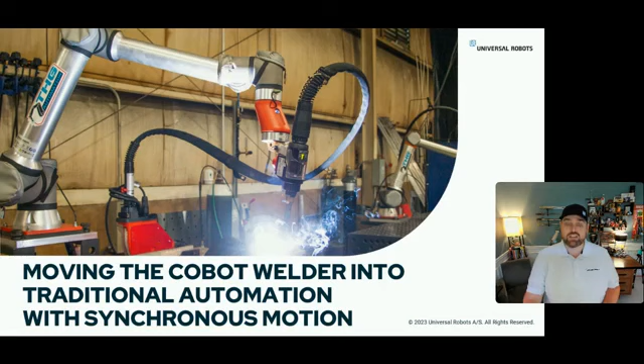You know, I always like to start out with, in metal fabrication, we do have some challenges, right? And we're going to talk about today how collaborative robotics is helping this.

But those challenges are things like major market trends that are having an impact, like our aging workforce and our rising labor costs. We have persistent vacancies. Even with the softening in the market, we still have nearly 900,000 job openings as of half a year in the United States in manufacturing and warehousing and logistics.

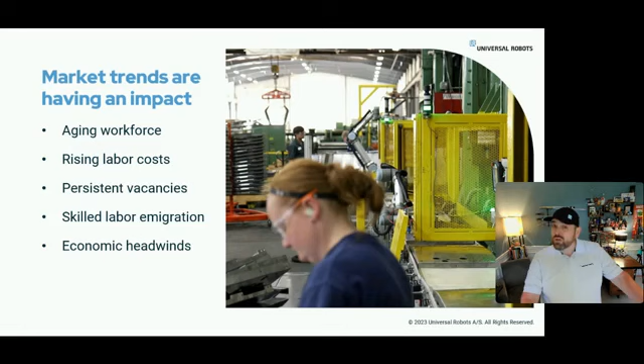Then, you know, we've got skilled labor emigration if you're in low cost of labor areas. And then there's just general economic headwinds going on right now that are all having an impact.

You know, also traditional automation requires robot technicians. And these robot technicians, their mechatronic skills and electrical and automation skills, these are in short supply. So when we have limited staff, it's really hard to take somebody and send them to a two-week offsite training course.

So that really, or if that person leaves and goes fishing, no one can run the robot because Jim's the only one that knows how to run it and he's off fishing. So what I want you to think about is don't try to trade one hard to fill role like a welder with another hard to fill role like a robot tech.

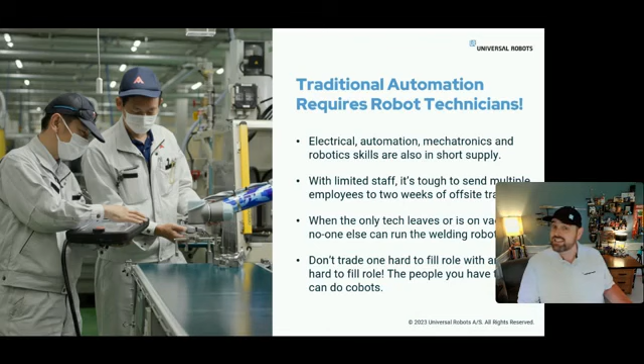So, you know, one of the biggest things cobots really bring is the people you have today can do collaborative robotics.

And then when we look at the weld shop itself, there can be a challenge, right? Depending on the material coming in, we can get unpredictable part fit up, or we can get variable worker productivity. On a hot day, we make less parts.

On a cold day, we make less parts. On a day after the Super Bowl, we make less parts. You know, so there's really that variable productivity.

There's post-process grinding and pre-assembly of parts, or banging it with a hammer. And so we get kind of this inconsistent productivity.

We end up with inconsistent output quality. If we're taking someone from a fryer on Friday and handing them a weld torch on Monday, it can cause quality issues. And really, ultimately, all that puts together really erratic production planning for the production management.

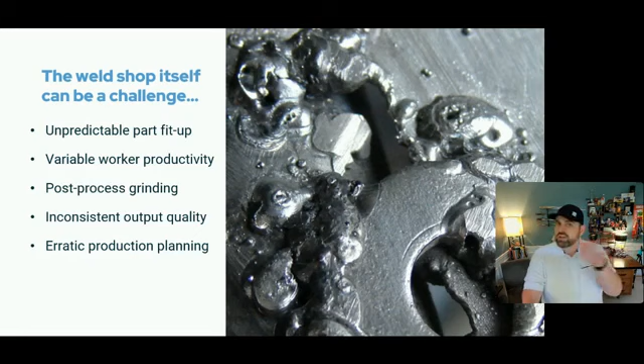And how do we get more consistency and more predictability in the weld shop itself? All these things come together and many more challenges that we're facing. It delays our production schedules. We have that inconsistent product quality. We could even lose customers or lose opportunities, even turn away business sometimes.

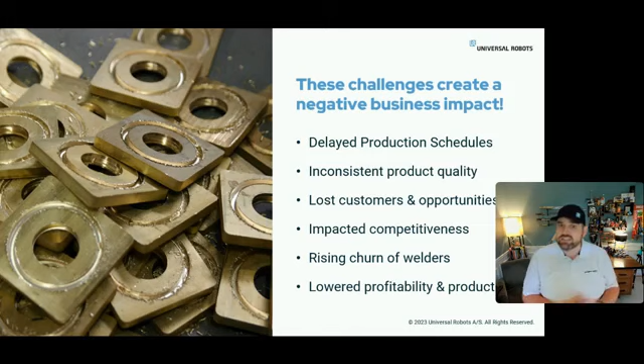We've talked about this in other webinars. And so how all this impacts your competitiveness, and it maybe even raises the churn of welders you have, ultimately leading to lower profitability and productivity.

So if we want to overcome those, collaborative welding is one way that many metal fabricators are overcoming this. So what is collaborative welding? I want to talk about that with you today real briefly.

You know, we have always embraced new tools and work. When we look at assemblers, they aren't using a basic screwdriver anymore to screw drive things and assemble things together. They're using drills and torque guns, right?

It's raising the quality level. It's making the work easier for the worker. When we look at carpenters out in the field, they have a nail gun.

They're not banging things with hammers over and over again all day. They get less repetitive stress injuries, and that's better quality, more consistent assembly of the carpentry. So when we look at other professions, especially other skilled trades, we see that there's investments in tools to make the work better. And the collaborative robot is really one of those tools.

We need the knowledge of the welder to build the weld. We need the knowledge of the welder to teach the robot what to do. But this is a new tool that we should embrace, just like the torque gun is there for an assembler, and just like the nail gun is there for a carpenter.

So we look at the Universal Robots cobot, and what's really powerful there is it's a very user-friendly technology for welders. The programming interface is very simple with step-by-step pictures from different partners, simple to set up, and you can review the path before you weld to make sure that you're getting the right angles and the right path you want. And then the ability to reach out and grab the robot and put it where you want it, be able to free drive for positioning the torch.

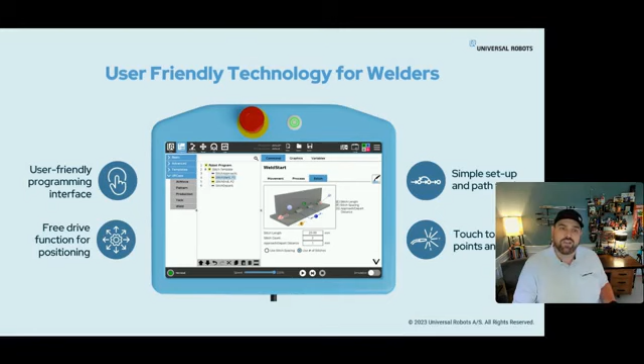Welders are very mechanical. Welders grab the torch and physically put the torch where they need it. They can grab the robot and put the robot where they need it. And so it's very easy for a welder to understand how to interface with the software. And then ultimately, the collaborative welding tools utilize this kind of easy and intuitive touch to teach style of programming that basically eliminates the need to be a robot programmer.

And so, partners like THG, and you're going to see some of their stuff today, they've got a teach flange on the end of the robot. So you can bring it in and free drive, and you can program in simple buttons. This allows us to do changeovers quickly. This allows us to really teach people quickly how to utilize a collaborative robot.

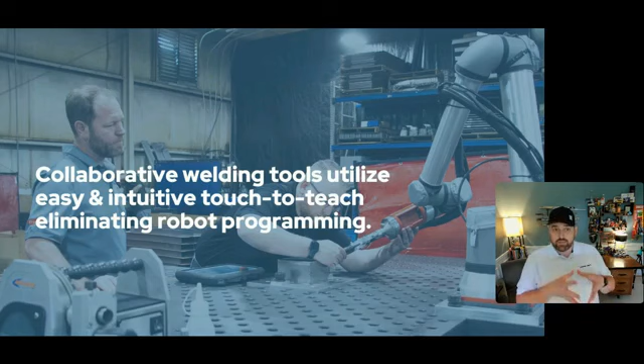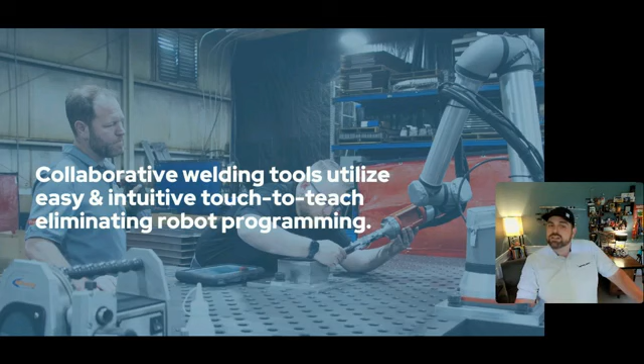So the power of this is really coming for folks in that we're not replacing the welder. We're really augmenting them and making them more efficient. Better quality is coming out, more consistent quality is coming out over long batches and long runs. And then the welder's more engaged because instead of doing boring work now, they teach the robot to do a simple 6-inch straight line weld. The robot does the 1,000 pieces while the welder goes and does something more creative. And so it gets rid of that focus on robot programming and gets people welding.

So Universal Robots and our partners have been doing collaborative welding for almost 8 years. The initial welding applications mostly were in the MIG space with some TIG, actually more than a little bit. And there are a lot of skill capabilities inside the partners, weaving and patterns and tacking and all these kinds of things, multi-pass and different layers and circular arcs and linear paths, and many different power sources are compatible. And you're going to hear from Matt about Fronius specifically today.

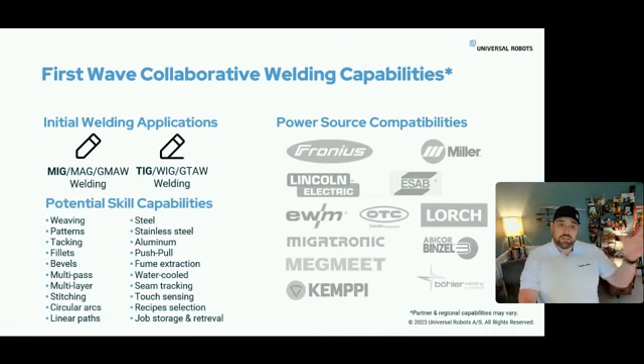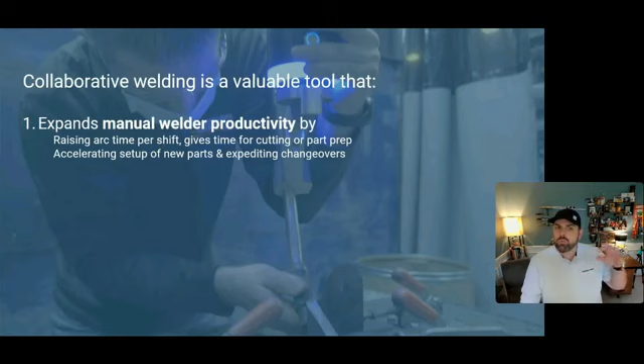But ultimately, this first wave of collaborative welding capabilities brought value in 3 ways. The first: it expanded the manual welder productivity. Most of the case stories you hear, 2x, 4x, even 10x sometimes, raising that arc time per shift, giving more time for cutting or part preparation, helping them accelerate the setup of a new part or changeovers being faster. It also drives production quality and consistency.

It improves the process repeatability, so we're making the same part each time, reduces the rework queue because we're not over welding and we're not creating areas of the part that we have to rework. And we're eliminating distracted welding from dull, repetitive volumes. If someone has to make 1,000 hanger brackets, that can be really boring. And we can probably see exactly where that welder gets bored.

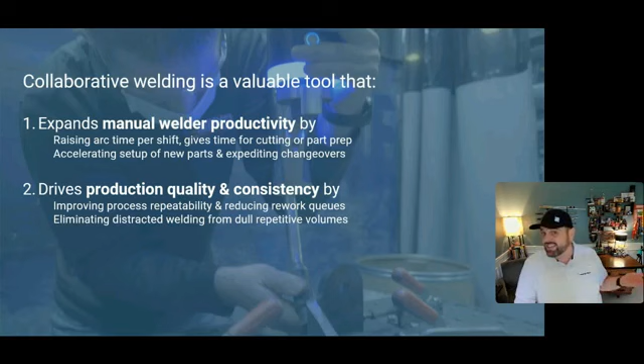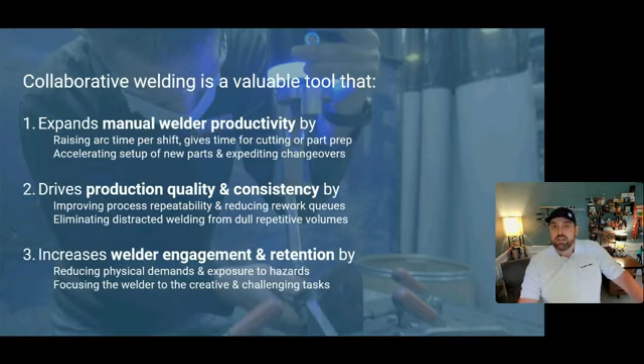And then it increases that welder engagement and retention because we're reducing the physical demands, the repetitive motion, the exposure to hazards like smoke and arc flash, and focusing the welder on more creative and challenging tasks. And so there's opportunities here, either in one piece or in 1,000 pieces, to do really cool things. But really, there's so much more.

And so with 8 years of this going on, there's a lot of advancements in collaborative welding that have been going on. And that may be a little bit hard to see. Sorry about the contrast there. I need to change that slide in the future.

But laser welding is being done by a couple of our partners here in North America and some in Europe and some in Asia. Spot and stud welding is going on. Metal cutting, you're going to hear about metal cutting today. Thermal spray coating, cobot portability, the fact you could bring the robot to the work, tending like a resistance welding machine, and then expanding the reach and high volume. And so I want to focus on the last 2 today, and you're going to hear about a couple of these also from Matt.

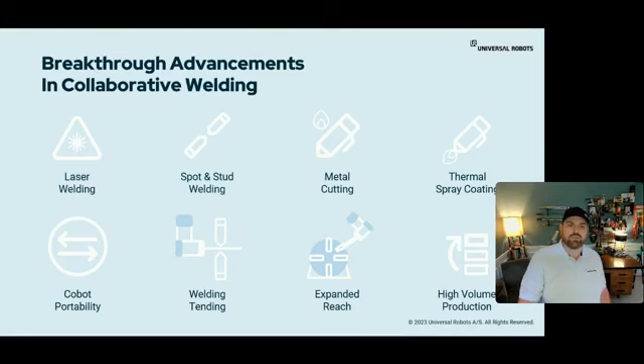But high volume production and traditional automation: most folks, when they think of a cobot, they think of high mix, low volume, and they don't think of high volume production. But actually what we're seeing in the market is many people are embracing the cobot for more traditional automation applications and higher volume production applications.

So here's a quote from Chris Anderson. He works for Betcher Manufacturing in Mexico. And he said, "I was having an issue getting qualified people that could program, adjust, and develop the setups for new products on our existing traditional automation cells.

I was looking for something that was easy to use and easy to teach, something that didn't take a college education or high school education, that somebody could operate it and understand it. For operators to just be able to grab the torch, put it where they want it, and simply say touch up was huge." And that came from a previous webinar.

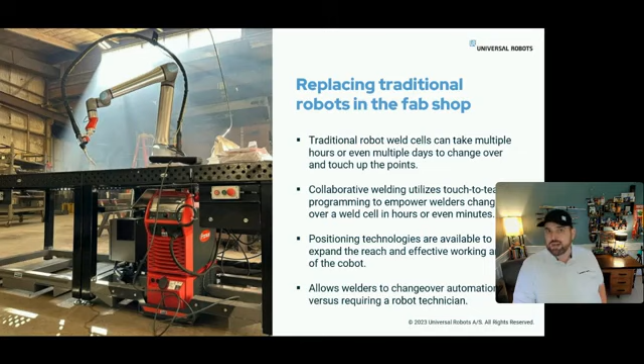And then also, positioning technologies are available to expand the reach and effective working area of the cobot. And all of this allows welders to change over the automation versus requiring a robot technician, which is really powerful, why you're seeing this happen.

One of the things I do have to point out, I don't know why my picture didn't show up there, but we're going to go with it.

A cobot is a robot, and it's something we have to think about. As we add traditional automation around the cobot, we do have to do safety assessments, and we have to look if there's curtains or those kinds of things. And then people say to me, well, then why would I use a cobot?

And it's ultimately about the touch to teach and the really simple to use programming interface, the graphical interfaces, and the step-by-step instructions about how to teach a weld that the cobot brings, that the robot doesn't, that really makes the cobot interesting in more traditional welding applications.

So even if you have to add safety, or you have to add guarding around the other pieces of automation equipment in the cell, the fact that the cobot can be taught in that simple way by non-robot programmers is a huge value for many people, and what we're seeing being done in the marketplace.

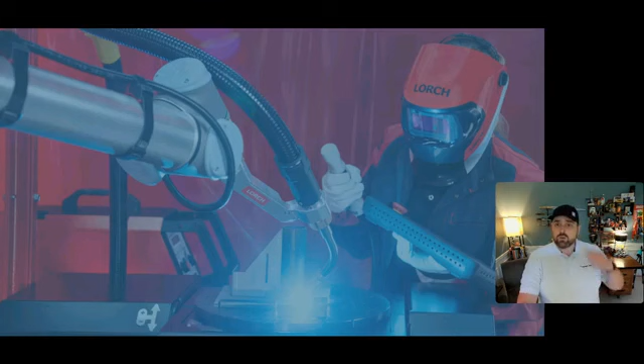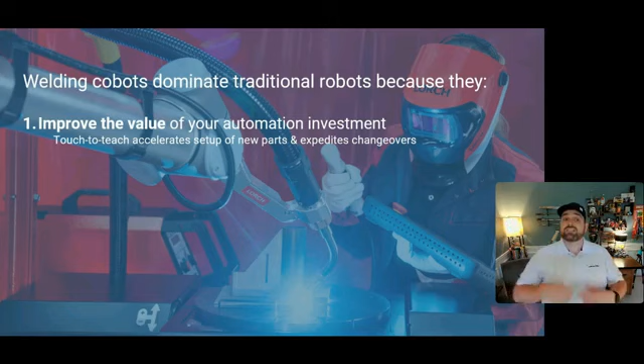So when we look at why welding cobots are starting to dominate traditional robots, it's because they improve the value of the automation investment. When you buy that automated cell, that touch to teach accelerates the setup of new parts, it expedites changeovers, and it creates shorter deployment and commissioning timelines.

If you think about return on investment, from the moment when you decide you want to buy automation to the time when you actually get the payback at the end, the amount of time to build out all the automation, plan the automation, and find partners and get everything going can take a long time with traditional automation.

And typically the cobot's a little bit shorter to do the deployment and the commissioning part of the project, and that allows you to get going faster. So then when we utilize the existing workforce, not traditional robot techs, that brings a lot of value, right?

We have many people that we've had conversations with over the last 2 years with traditional robot cells sitting idle, dusty, because the trained robot tech left or forgot how it works, or it was just too hard, so they decided to weld the parts by hand instead.

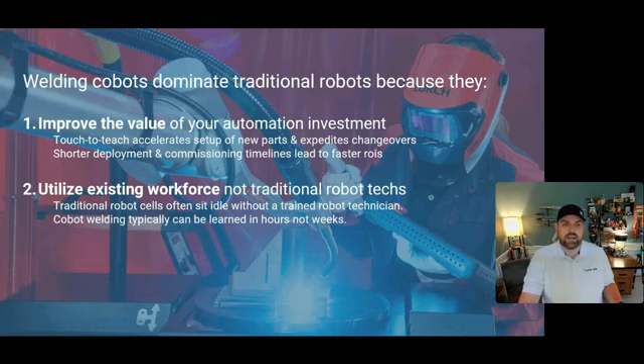Cobot welding can typically be learned in hours, not weeks, and that's really valuable for folks. Days, typically. So then we can expand the impact of automation in the shop, right? Then we can create value for more of our production mix.

I see a lot of folks even use a Cobot for single piece jobs because the quality is more consistent and higher, especially when you're doing retail displays, something that's going to be general public facing. You want the quality of the welds to be really nice, right? And then portability is leading to all kinds of new possibilities about bringing the Cobot to the work.

So when we're looking at expanding the reach of collaborative welding robots, the first thing that most people think about is get a bigger robot. And the UR20 is there. The UR10e is by far the most popular welding robot that we sell. The UR10e reach is 1,300 millimeters, and that's a very powerful robot.

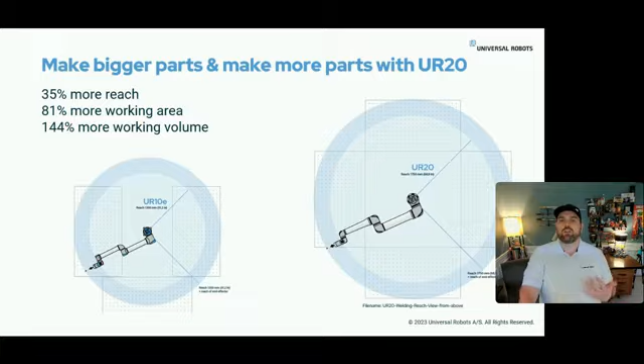By expanding to a bigger robot, we get that much more reach, that much more working volume, more than 100%, 144% more working volume out of a UR20 versus a UR10e. But even if those aren't really working, many people, when they go to traditional automation for welding, look at external axes or positioners or rails. And those become part of the automated cell.

And so we get the question a lot, can cobots control these? And the answer today is yes, absolutely. Cobots can control these with the Universal Robots Motion Plus platform. Motion Plus is this add-on software. It's an API that allows the UR controller to coordinate robot motion with external servo axes.

Again, my picture didn't load. I'm not sure what's going on with my deck, but we're going to keep going.

So this API really consists of functions of coordinated motion. It uses EtherCAT for drive communications with the servos, and even more functionality will be added in this space as we go into the future. Motion Plus enabled solutions from Universal Robots, you can get them from partners, integrators, OEMs, and end users can use these to expand the capabilities of their robots through external axis control. This is really enabling more and more traditional robot applications. You're going to see some of those from Matt in a second.

So how does Motion Plus work in the most basic way possible? The UR controller itself contains the model and the kinematic tree and everything necessary to make the coordinated motion happen between the robot and the external axis. We have an EtherCAT URCap service that does the communication between the servo and the robot, and no external PLC is required to use Motion Plus, but it is an API that's integrated by other folks. This is a back-end integrated by UR, and then partners like THG integrate it into their product.

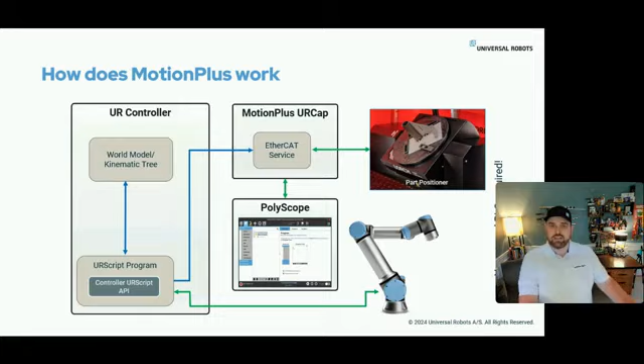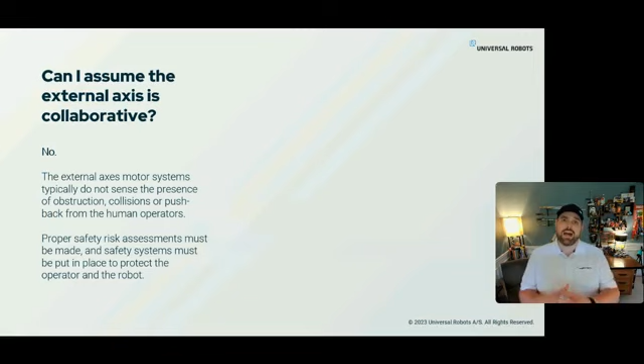So can I assume this external axis is collaborative? Unfortunately, you cannot assume that an external axis is collaborative. That's not the intent here. The external axis motor systems typically don't sense the presence of obstructions or collisions or pushback from the human operators. So proper safety risk assessments must be made when utilizing external axes, and likely safety systems must be put in place to protect the operator and the robot from the external axis.

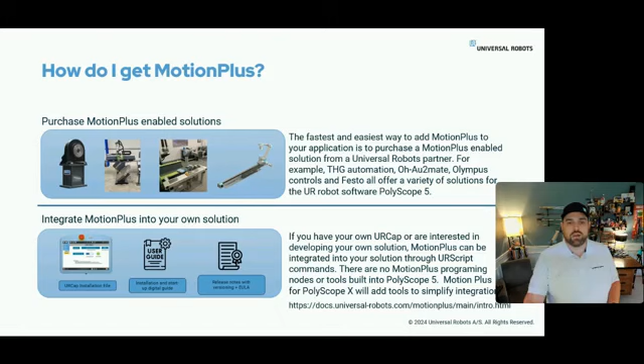So how do you as a user access Motion Plus? Ultimately you purchase the Motion Plus enabled solutions from partners like THG Automation. You're going to hear about Matt's solutions next. Or if you're someone who actually makes solutions, maybe one of our partners in the audience, you could integrate Motion Plus into your own rail or your own axis, and the information's on the UR website. So UR ecosystem partners absolutely make all of this possible.

I'm so excited to have Matt here. With this philosophy that we have at UR, where we're a platform that others can build successful organizations on, we're really committed to your success, and to their success at helping you have access to automation. So I'm going to turn it over to Matt. Matt's going to talk about the Cobot welder with synchronous motion. I'm really grateful he's here. And Jules, if we can share Matt's presentation, that'd be great.

Thanks, Will. I appreciate that. Your presentation was great, and I think it was spot on, explaining the iterations that the platformers went through and how partners have expanded on the capabilities of Universal Robots API, the URCap capabilities, and being able to move into new directions and expand their app store for robots.

And I think you said something really great, that cobots are robots. And I think at some point in time, cobot's going to be a less important piece of the description, and more of the mainstream explanation is what you can do with it and the types of applications you can apply with it. So yeah, my name is Matt with THG Automation.

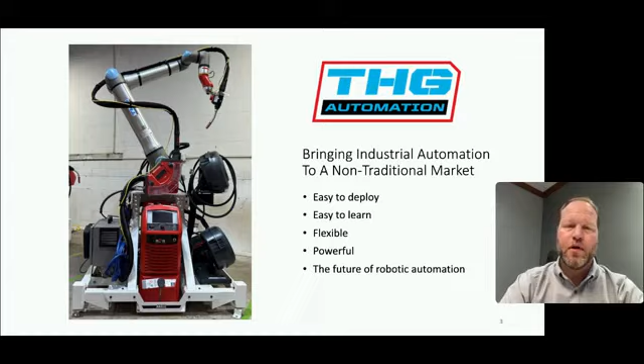We started out with Universal Robots because at the time they were the best, and we still think they're the best. They have the most robust, well-supported, consistent quality product we've ever seen. I've worked in robotic automation for decades, and I've seen a lot of stuff show up on the floor that was DOA—no good, had to be repaired, failed right before runoffs. It just didn't have that consistency. Universal Robots has been rock solid for us, so we're glad we made that choice.

We use Siegmund tables for the welding side of things because we think it's again the best thing you can buy. And obviously you have the other industry leading partners with Hypertherm and IHT, which we also integrate. There's other things we're doing too—we're going to release some IPG laser welding systems here soon as well, and you'll see a little bit coming up here.

The portfolio that we have with THG Automation spans quite a bit of processes and capabilities. I want to get into this because it spells out the overall theme: you can now integrate with external axes and Universal Robots Motion Plus, which ties this all together. There's so much coming that traditionally customers couldn't accomplish, because they couldn't take the advancements of traditional automation but still have the ease of use and flexibility of the Cobot.

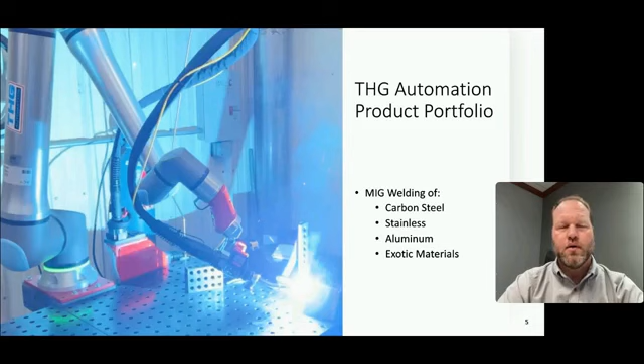We also do TIG welding. TIG is not as easy - it's really a credit to the welders out there who are good at MIG or TIG welding. There's a lot happening at once, and it takes somebody with good knowledge to make it work right. But we have customers, especially in aerospace, that require it, and food grade applications often need TIG too. So we built a TIG welding solution that's nice and rounded, with just about every capability you can imagine with any traditional automation. We do that with our Cobot because UR has the platform that allows us to create the software and functionality our customers need.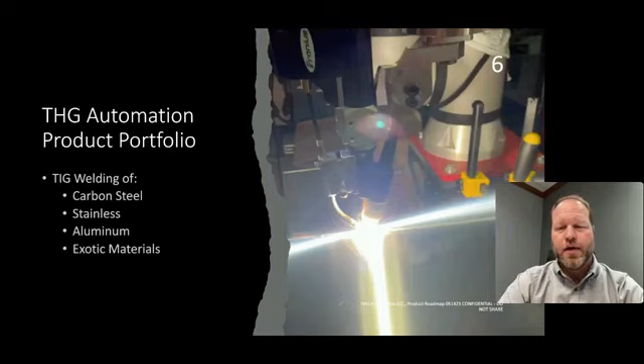We've got oxy-fuel cutting too. Customers use this for thick materials and beveling. They'd had a lot of issues with track-based solutions trying to cut parts, with high scrap rates and mistakes. So we generated this Universal Robots-based platform with IHT so customers could easily bevel and repeat processes with the oxy-fuel cutting solution we source from IHT. IHT has done a great job creating a complete package that's great for gantry-based or 6-axis robot-based applications, and that extends to what we do with plasma.

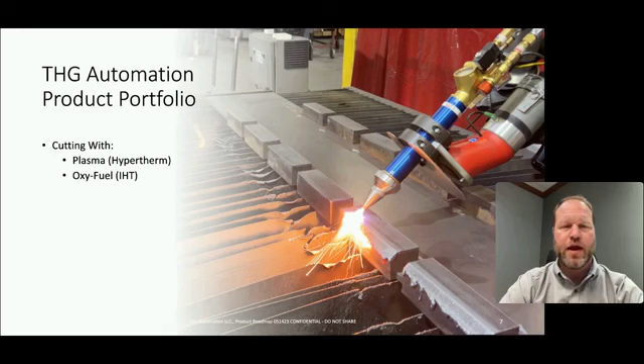With plasma, we've got some really cool stuff coming, including the ability to cut corrugated material without programming all the undulations in it. Of course you can also do simple shapes just by putting the robot where you want it and specifying what size hole or what type of square or rectangle to cut. We've built some really cool functionality because we have the platform to do it with, and we're excited to get more of that out. As time goes on, the website will be populated with that, and the UR Plus platform that UR created for us is really awesome - you can go on there and peruse all 400-plus different applications Universal Robots offers.

The last piece we currently offer with our welding and cutting solutions is up to 4 axes of linear or rotational axis control. We use the robot controller and Universal Robots programming platform to control up to 4 axes. It works great - it's Modbus based right now for consistency with the controller's capabilities. We've been selling a lot of positioners in linear and rotational axis types to customers all over the world. It's been a hot item.

We saw this coming - we saw the capabilities customers were looking for, and this is the nexus, the next thing that needed to come with the Cobot, because ease of use needed to expand into more traditional automation platforms. Probably two years ago we came out with this for a customer, and it's exploded from there. I don't think half our customers would be able to use the automation nearly as much without the linear and rotational axes capabilities. So headstocks, tail stocks, robots on tracks, moving parts on tracks - all of that is controlled from the Universal Robots pendant through the standard Universal Robots UR cap.

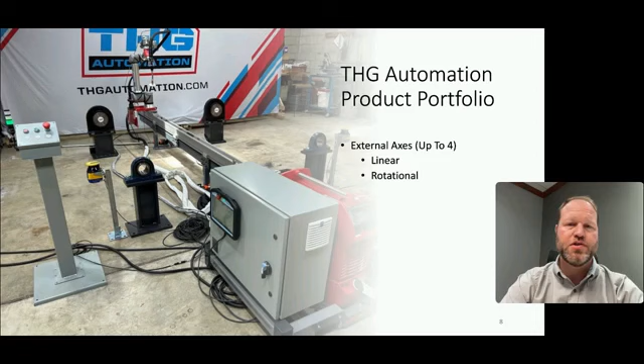I think this is going to explode with all the applications our customers are trying to achieve. So, what is the external axis? How does it add value? Some people that have seen external axes, maybe they've rotated pipe, or created some type of flip mechanism to flip a part back and forth. Those are pretty basic. You got an air flip, or an electric motor that spins, and you got to do a timer or something like that.

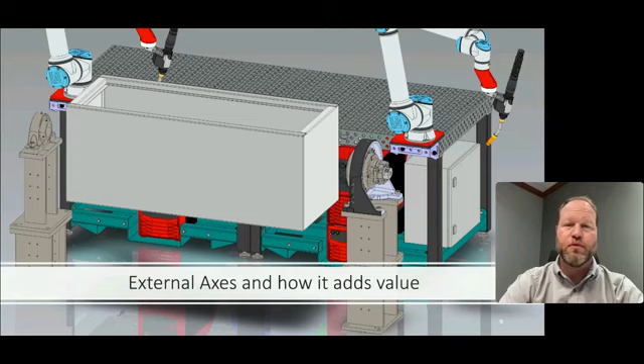Those are the basic ways of doing this. But because we're servo controlled, our customers can take things like large assemblies that you have to reposition for robots to be able to access them. You can rotate pipe while you're welding it. You can do flips of like ladders. There's so many things our customers need this for: fuel tanks, large mufflers, you name it. There's so many ways this could be utilized, including building stations out of this.

So you could flip to a left station or a right station, or a forward station, back station 1, 2. There's so many ways you can take those 4 axes and implement them with our system, because of the flexibility of the platform we've worked with.

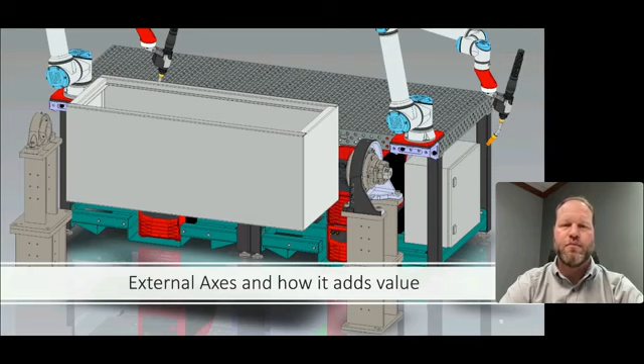So let's go back to basics: the 6-axis robot and its limitations, and why the external axes have been such a big win for us on the Universal Robots platform we've integrated with. The 6-axis robot, that's just 6 axis, right? So your reach is based on a radius. That radius is both up, down, left, right. So the robot can reach so far, that's it.

You can put an end effector on there to give it a little bit more reach, but then you have to deal with some issues: if you rotate the torch backwards in a welding or cutting application, now you've lost distance from the center of the base of the robot. These are challenges you could fix, I guess, if you changed your end effector, or did some type of creative mechanism on the end of it, or if somebody moves a part and makes it closer to the robot during the process.

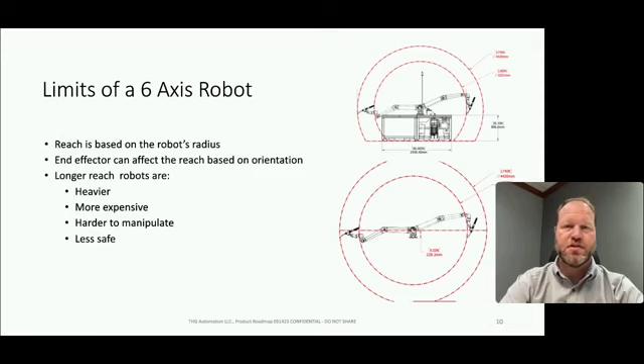You could also go with longer reach robots, but now you've got a heavier robot that's more expensive, harder to manipulate, and potentially you lose safety because of that reach, the speed it's moving at that distance, or the payloads it has. So the external axes has been huge, and this is before coordinated motion has been available. That's really the basis of why extending coordinated motion with the external axes is going to be huge.

If you're counting these axes, one motor on a robot means one axis, and the robot typically takes up 6 — and in this case they do, because we're using Universal Robots as the example. But once you get to 6 axes, now you've got another axis that's external. So you got a 7th axis, and a lot of people call it the 7th axis, but really you could do a 2nd external axis and call it axis 8. Then you'd have a 3rd external axis, and call it axis 9, and you can keep going from there.

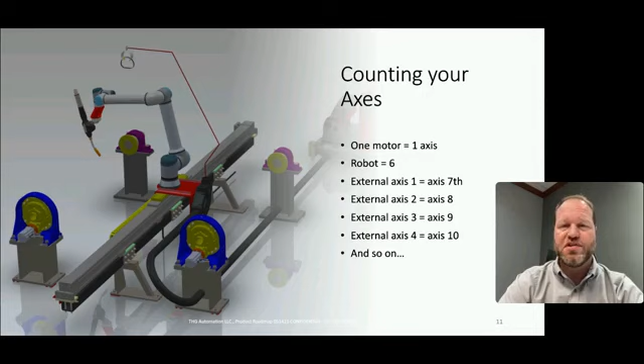And coming up with coordinated motion, we'll be able to do 6 extra axes. So you'll be able to count that number up to 12, and you'll be able to group those together. This really, really makes a huge impact on the capabilities and what we see coming with this type of solution.

The current things that we sell right now are servo controlled, not synchronized or coordinated. Like I said, we go up to 4 axes. They're really easy to program. Again, it's the same ecosystem as our welding or our cutting. You just put the external axis UR cap in the robot.

It doesn't have to be our system, it could be anybody else's. You buy the software from us, and you use any type of Universal Robots E-Series, or the UR10 or UR20, or UR30 robots, and our software plugs right in. And you talk Modbus — we've got some setup stuff for it, and you can use it with other applications.

You could use it with gluing, or with some type of material handling application where you want to slide pallets back and forth and control it with a servo. All that stuff's totally capable with what we've got, and it doesn't have to be a companion with our welding and cutting. This isn't just about us selling welding and cutting, but about allowing customers to use a simple, easy, flexible robot and extend its capabilities past what the robot itself could do.

This is an important piece of what Universal Robots has been pushing for, and what we've been pushing for, in order for our customers to have access to things they've needed that traditional robotics has not given them. So again, it's adding the reach for applications they couldn't access before.

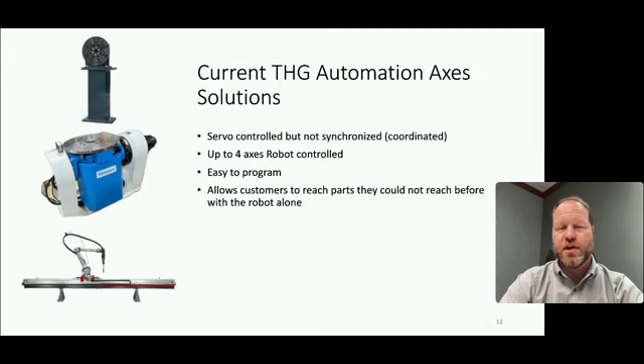If we go into the rotational side, a rotational axis is just a single motor, your 7th, 8th, 9th, or 10th motor, which are your axis 1, 2, 3, or 4. You can rotate something from a point to a point with the program knowing where that axis is at, but you don't have that coordination where the robot is able to follow a part. But this is stuff we sell right now, and it's been a really popular item.

These can be used for flipping a station back and forth, or you can do some type of spin and weld, or cutting where you flip a part to cut one side or the other. It's really up to you what you want to do with it, as long as you're not trying to coordinate the robot with it in our current applications. And again, you control it in degrees of rotation.

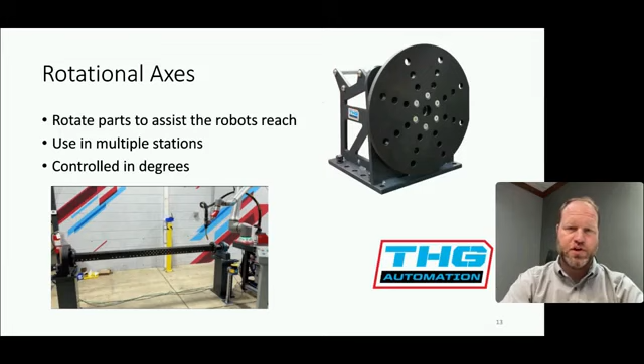If you go to the linear side, it's a little different. The linear axis gives us the ability to move the robot from one spot to another with that servo control again, so you'd measure that in millimeters or inches. You can move the robot between stations.

Let's take this example here. You could have 4 tables set up in a grid, and the robot could access all 4 stations - we've got customers doing that, and it's worked out wonderfully. So you really take a robot you wouldn't want to put a bigger robot in, or couldn't, but you could access all these stations by just putting a track underneath it and adding that to the program capabilities.

So doing things like structural beams, trailers, ladders. We've got customers doing roll-off containers for trucks with 6-meter tracks. There is a limit on the length of the track we can implement, but it's getting longer. There's really some cool stuff out there, some we can share and some we can't, that our customers are using these for - augers, centrifuges for ethanol manufacturing or creation.

And then just any type of long part where the robot's radius that we talked about earlier isn't as important as the robot's linear reach. So there's a lot of stuff these tracks have been great for our customers, allowing them to do stuff they couldn't do before.

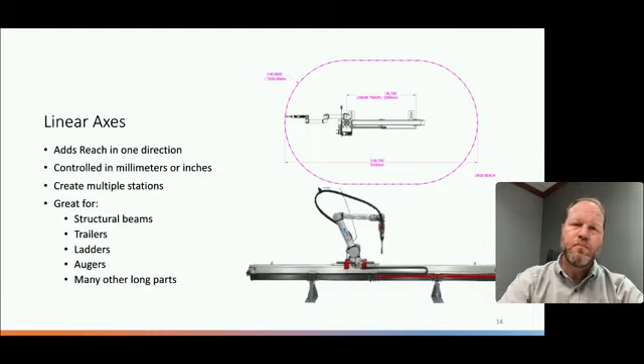The synchronized motion with Motion Plus really is the robot and an external axis, or up to many external axes, being coordinated and made possible with Universal Robots' Motion Plus application, along with THG Automation's ability to take that and create a nice, friendly user interface for it.

So where this sits is, we now can synchronize the robot so that as an external axis rotates, the robot knows where that's at - they call that synchronized. The robot and the axes will move at the same time, and they'll achieve their respective points at the same time, making things like this piece of pipe in the picture totally doable now with the Universal Robots platform, where we couldn't do this stuff before.

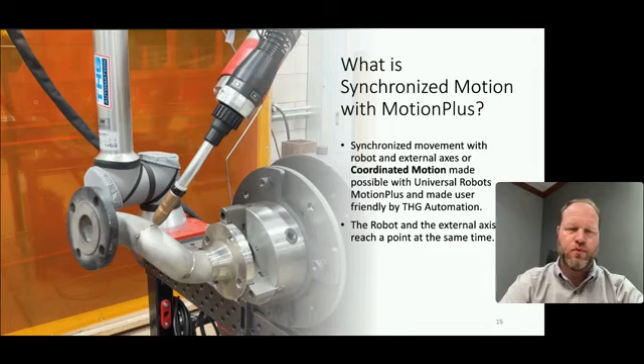So odd shapes, off-center shapes, oblong - just any type of component that needed to be welded, cut, or glued, or any type of process you want to apply, can be achieved by simply adding this capability. And this is going to be huge for the robot and the options our customers have.

So why coordinated motion with Motion Plus? Well, the tracking of the robot's position - when the robot goes to a position and stops at the same time as that axis, that's not the end of it. The robot knows where it's at as it's moving, so it's not changing its travel speed.

So let's say you're trying to weld a piece of material and the robot is rotating or moving around that part as it's rotating - the robot is actually maintaining its travel speed, or its TCP, tool center point speed, as that part rotates, because the Cartesian coordinates attached to that axis are rotating with it, and the controller knows it. It's a complex process in the background, but we make it super simple for the customer to implement quickly and easily, without having to know all the details about how it works.

So now we can start doing things like, in this case, we've got some track applications where there's a point in space that is not moving, but the robot can be moving, and the robot knows where it's at in relationship to that fixed point. So now you can weld parts, and you can shift, do touch sensing, seam tracking, path recording, and all the things you would normally do with a traditional industrial robot, you can now do with coordinated motion.

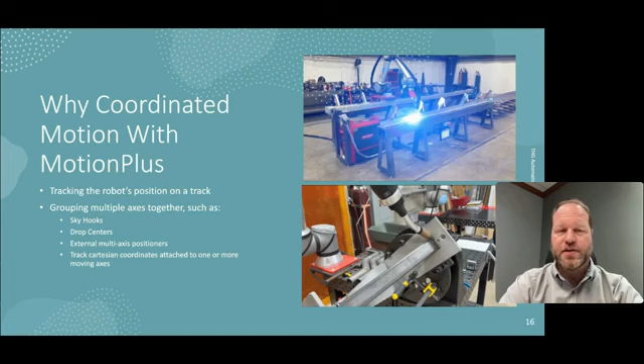The applications we're talking about: exhaust components with mufflers and pipes - those will now be accessible. So if you've got off-center components that are rotating, getting closer and farther away, the robot knows in space it's drawing a circle, even though that pipe is swinging around as it's being welded. All that stuff can be tracked now.

Augers, like you see in this picture, that stuff is completely doable now with coordinated motion and the Universal Robots platform. This is going to be a game changer for our customers, and the ease of use is going to make it accessible for high mix, low volume applications.

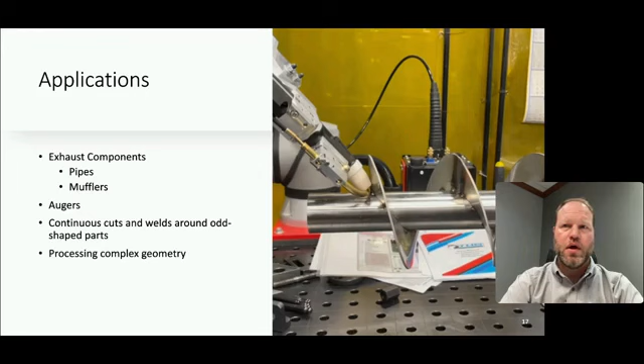Continuous cutting on pipe will be accessible now. Welding around odd shaped parts will be accessible. And just complex geometry in general - even if you're not welding and cutting, you'll have access to that here in the future. So we're really excited for that.

So how does this make a difference for our customers? Well, they're going to be able to process complex parts they couldn't do before - continuous welds and cuts, and gluing applications where starts and stops are not acceptable, where you have to have hermetic seals and starts and stops create issues or create stress points for failure. All those things can now be eliminated with coordinated motion added to the Universal Robots platform.

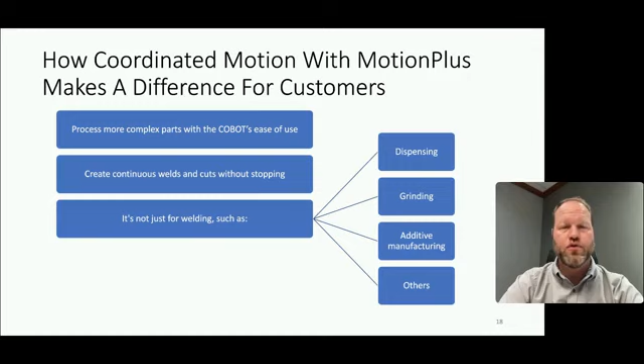And again, it's not just for welding, but for dispensing, grinding, additive manufacturing, and other applications where the cobot traditionally wouldn't have made sense because they didn't have full control and full positional information from those axes. So what's the future?

This is going to allow companies to take advantage of cobots in more traditional applications, like Will was talking about, than they ever could before. And it's going to bridge that gap, or maybe blur the line between cobots and traditional robots. Things that people said you can't do with a cobot - you're not going to hear that much anymore. They're not going to have any validity to that.

It's going to be a really, really interesting future for the robotics industry in general, because now more people have access to the value that automation brings to traditional applications - more automotive and aerospace environments, where now the cobot will be a great fit. And I can see this even going further in the future.

And then just a little tidbit of what we're going to offer. Eventually, we'll offer a more universal platform so that a customer can implement just about any type of process with our coordinated motion Universal Robots URCap, and that way they're not stuck buying the process and the equipment together. Or if they have something that they want to implement coordinated motion with, but it doesn't allow them to do it because of who they bought the equipment from, they can easily transition that over.

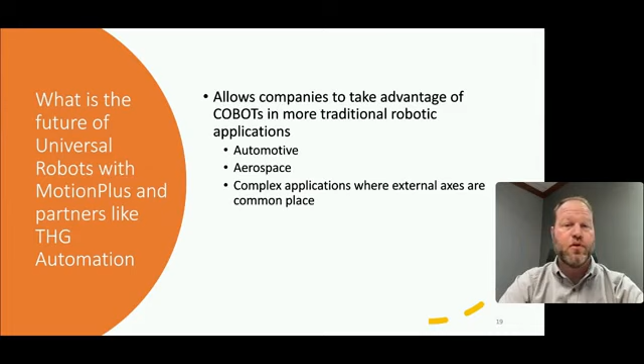They can control the IO, and we'll allow them to do some of the stuff they couldn't do before with our add-on application to the platform. So this will be really cool for customers that are really kind of stuck in this quandary of, oh, I need this, but I can't do this if I buy that. We'll make that a little bit more universal. With that, what challenge are you trying to solve?

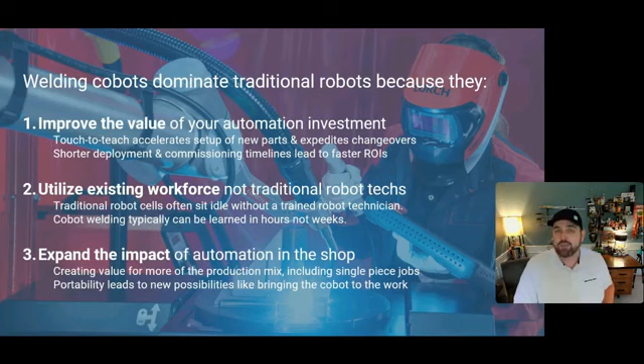And just as a refresher, welding cobots are dominating traditional robots because they're improving the value of the automation investment. They're utilizing existing workforce and not the traditional robot techs. And cobots are really expanding the impact that automation can have in the fab shop way beyond what a traditional automation investment can do. UR is the definitive market leader for collaborative welding. We're on our 6th generation of cobots, while most are still on their first. We have 8+ years of collaborative welding experience, more than any other robot company.

And we have hundreds of great local and global solution partners like THG that are integrating and adding solutions together, and hundreds of years of welding robotics experience in the UR ecosystem. The THG folks are just absolutely loaded with experience and knowledge, and you could see that today in Matt's presentation. And we have thousands of successfully deployed cobot welders around the world, adding value every day in a fab shop. We have this strong global partner ecosystem.

If you're thinking, I would like to be able to do this with welding, if you could get by with the standard solution, there are standard solutions like some of the things you saw in the cobot cart that Matt presented. But if you need more customized or specialty situations, there's ways to do integration, like some of the things Matt presented. And UR stands up to the competition. We have market-leading welding path consistency and repeatability. It's been widely tested by many customers and other third parties, and we create really consistent part quality.

We have this awesome partner ecosystem that combines the free drive touch to teach, and it just makes really great operator engagement and flexibility. I encourage you to get a pendant in your hand and try it out.